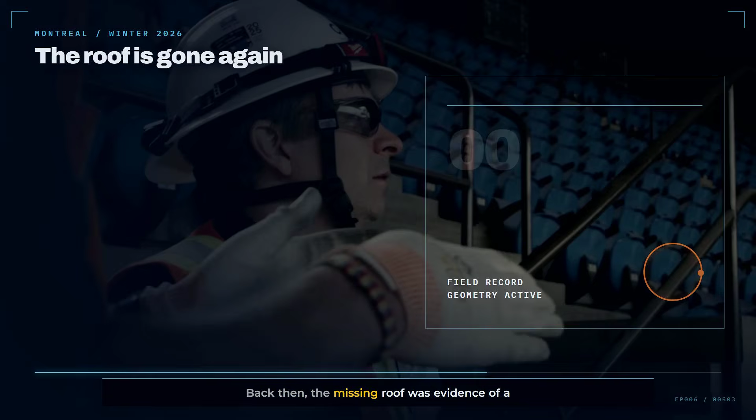In the winter of 2026, Montreal's Olympic Stadium looked strangely familiar. The white roof was gone. The center of the building was open to the sky. Around the opening stood the same concrete ribs that television cameras had shown 50 years earlier, when athletes entered this stadium for the 1976 Olympics. Back then, the missing roof was evidence of a deadline the builders had not met. This time, crews had removed it on purpose.

They took down 42,019 square meters of fabric. They dismantled 1,332 tons of steel and pulled out more than 22 kilometers of cable. Beneath the field, workers poured over 1,700 cubic meters of concrete just to protect the floor from the machines that would work above it. Quebec has committed 870 million Canadian dollars to put a roof back.

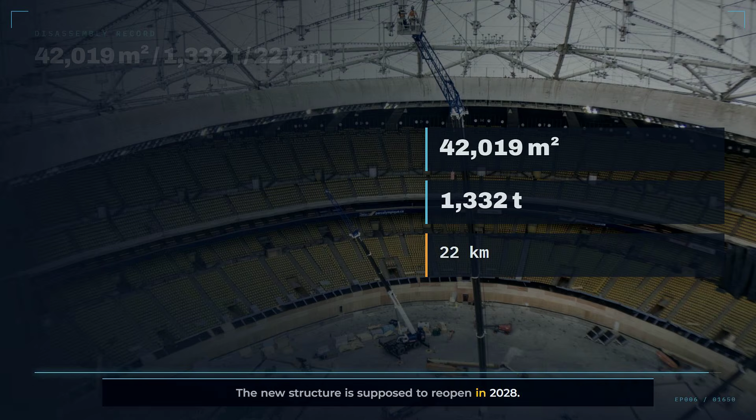Not the roof the architect promised, not the roof that finally arrived 11 years after the Olympics, not the roof that replaced that one and split open during preparations for an auto show. This will be a third answer to the same problem. The new structure is supposed to reopen in 2028. It will be rigid and permanent. Crews will assemble it near ground level, lift it more than 60 meters, and connect it to a stadium whose load path was designed around a very different idea.

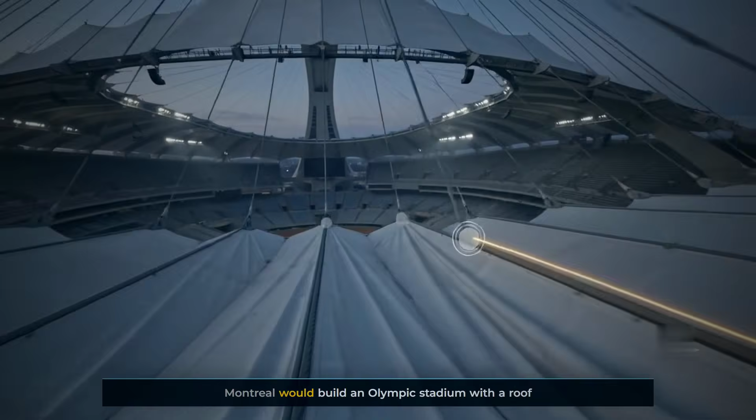That idea was simple enough to describe. Montreal would build an Olympic stadium with a roof that could disappear. It was much harder to make real. For half a century, the roof has controlled what this building can do, when it can open, and how much public money must follow it. The stadium has hosted baseball, football, soccer, concerts, trade shows, and more than 66 million visits. It is not an abandoned ruin, but it is a building whose most famous moving part never became dependable.

To understand why Quebec is spending almost another $1 billion, we have to begin before the first concrete rib rose from the ground. We have to begin with a mayor who believed deadlines could be commanded, an architect who designed buildings like sculptures, and a roof that depended on a tower which did not yet exist.

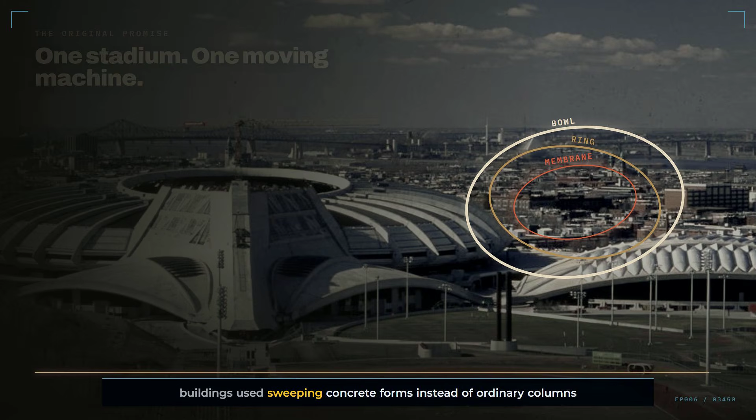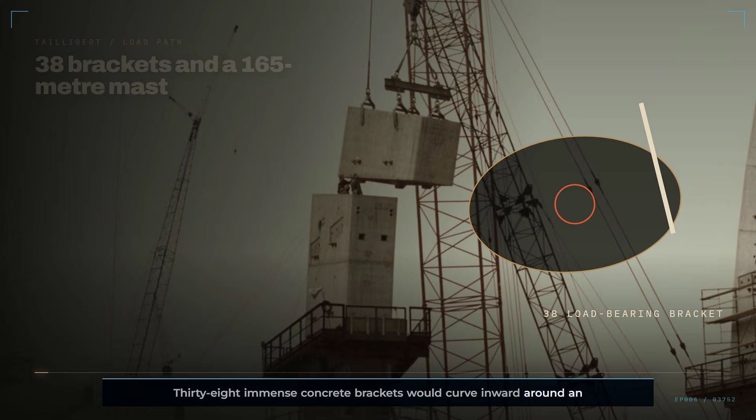Jean Drapeau wanted the 1976 Olympics to announce Montreal as a modern world city. He chose the French architect Roger Taillibert, whose sports buildings used sweeping concrete forms instead of ordinary columns and boxes. Taillibert did not draw a conventional stadium with a lid placed on top. He drew one system. 38 immense concrete brackets would curve inward around an elliptical bowl. They would support the fixed edge of the roof and the upper structure of the stadium.

Beside them, a mast would lean over the site at 45 degrees. At its full height, the tower would rise 165 meters. The central roof would hang from that mast. Taillibert's scheme treated the open center as a suspended membrane. Steel cables would descend from the tower, pick up the fabric at 26 suspension points, and pull it into shape. Edge cables would tie the membrane back to the concrete ring. Winches inside the system would raise and lower the fabric.

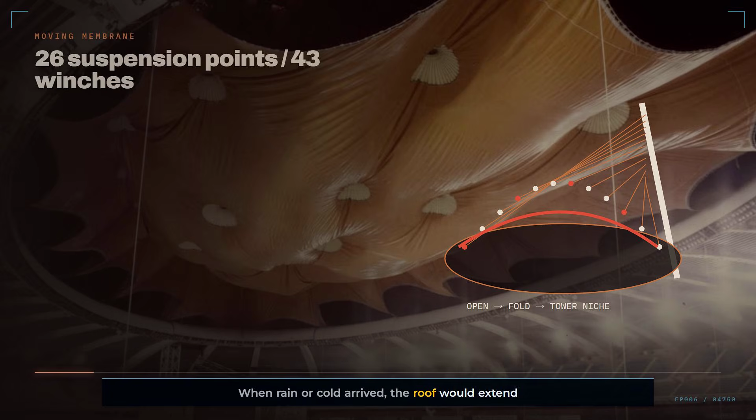When the weather was good, the membrane would fold and retreat into the tower. Spectators would see daylight. When rain or cold arrived, the roof would extend across an opening roughly 200 meters long and 140 meters wide. It was not a dome, it was closer to a tension saddle held in the air by a giant leaning crane.

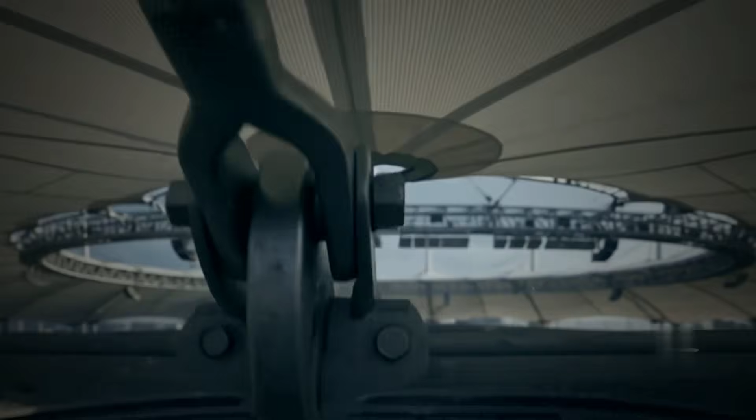That distinction matters. A rigid dome carries compression through solid members. A membrane carries load through tension. Its shape is part of its strength. Pull it evenly and it becomes stable. Let wind, snow, temperature, or one cable change the forces unevenly, and the shape responds everywhere.

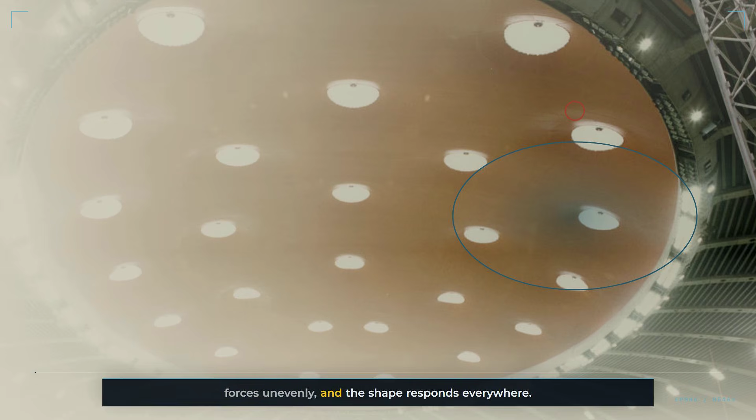The roof was also eccentric. Its tower stood on one side rather than directly above the center. The cable lengths and angles were different. A gust did not arrive as a neat, symmetrical laboratory load. Montreal's snow did not settle according to a drawing. None of that made the concept impossible. Cable roofs and fabric structures can cover enormous spaces with very little material.

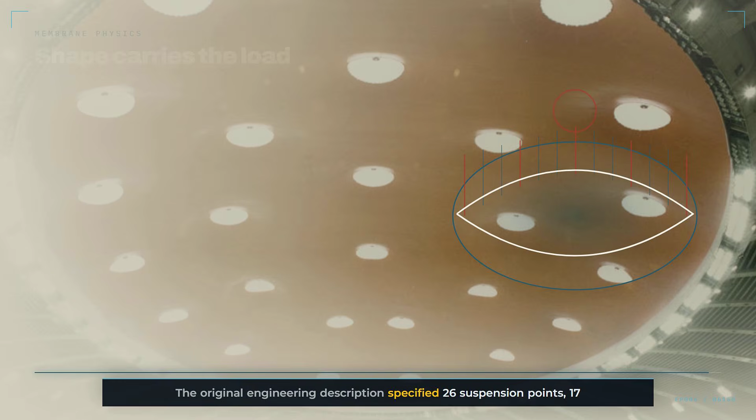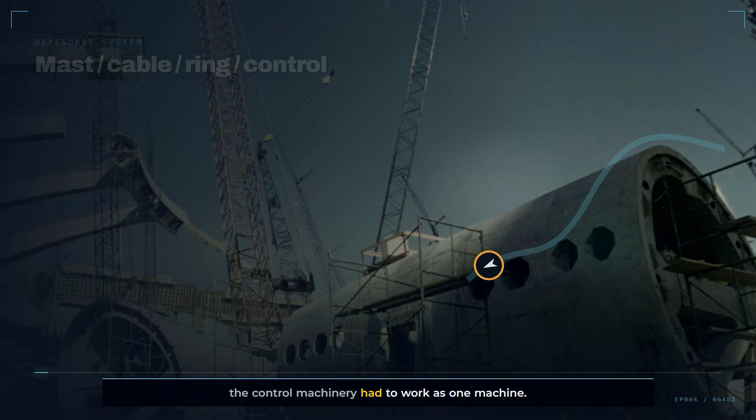The original engineering description specified 26 suspension points, 17 edge cables, 43 winches, and a nominal opening time of 30 minutes. But the roof, the mast, the concrete ring, and the control machinery had to work as one machine. Montreal started building before that machine was fully resolved. Excavation began in April 1973. The Olympic opening ceremony was a little more than 3 years away.

The stadium was made from thousands of precast and pre-stressed concrete pieces. A factory called Schokbeton was created to mold them. Each bracket arrived as a sequence of heavy segments that had to fit the geometry of the bowl and carry forces back into the foundations.

This was slow, exact work inside a political countdown. Construction disputes, labor stoppages, design changes, and rising costs consumed the schedule. By 1975, the province created the Régie des Installations Olympiques and took control of completing the facilities from the city. The date could not move, the design could. The builders concentrated on the parts required to hold the games.

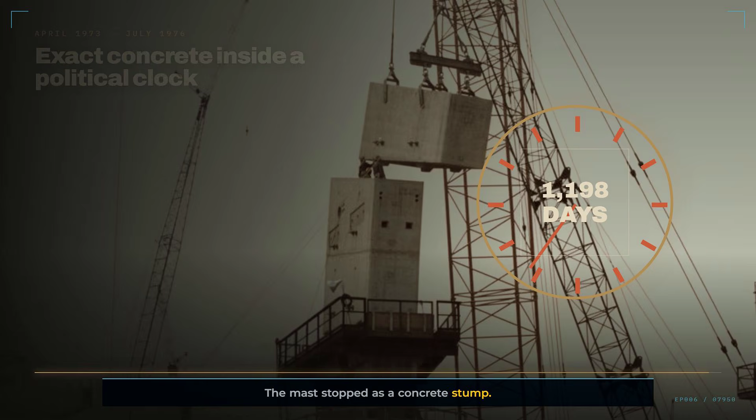They completed enough of the stadium bowl, seating, field, and fixed perimeter cover to receive the public. The mast stopped as a concrete stump. The moving roof remained a future component. On July 17, 1976, 12,000 athletes and officials entered before more than 76,000 spectators. Television carried the ceremony around the world.

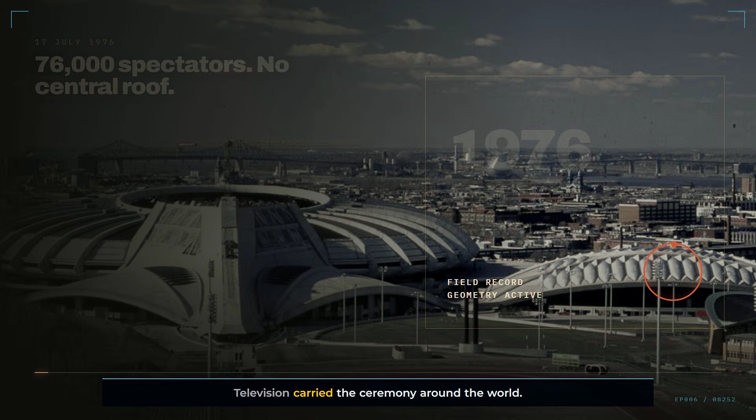Above them was an opening. The games could proceed because it did not rain during the opening ceremony. The unfinished tower sat outside the broadcast frame whenever the right camera angle could avoid it. The stadium fulfilled its immediate purpose, but the architecture shown in the model was still incomplete. The cost was no longer incomplete.

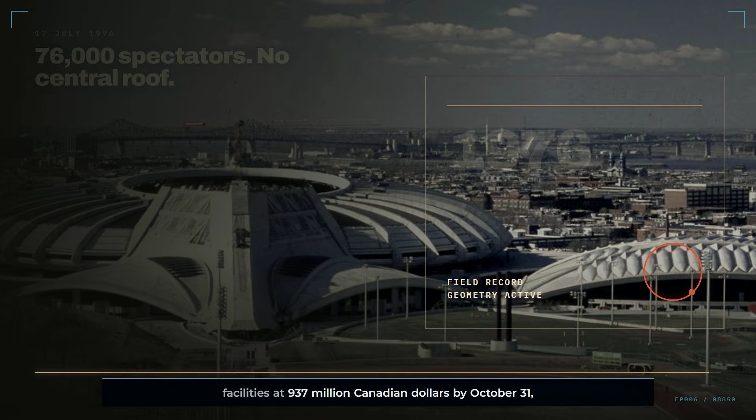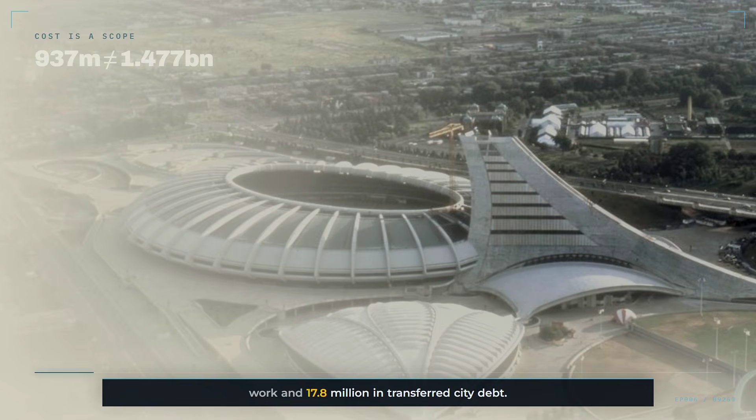Olympic Park's own history places the cost of the facilities at 937 million Canadian dollars by October 31st, 1976. Contemporary accounting cited 922 million for the installations at that point, followed by 537 million in post-games completion work and 17.8 million in transferred city debt. That produces a construction and completion scope of about $1.477 billion.

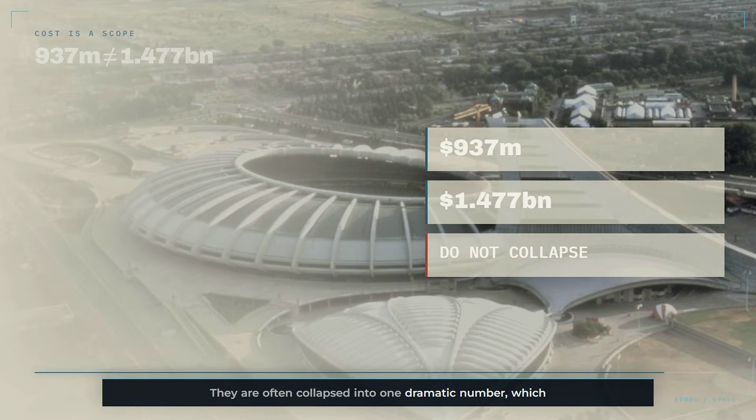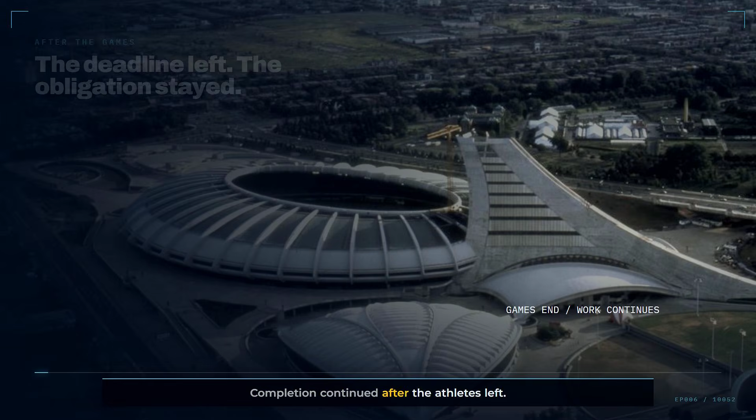Those figures do not contradict each other, they measure different dates and different baskets of cost. They are often collapsed into one dramatic number, which makes the story easier to repeat and harder to understand. The same problem appears whenever somebody says what the Olympics cost. The Games had an operating budget. The city and province built facilities. Borrowing added interest. Completion continued after the athletes left. Dedicated taxes and other financing paid the debt over decades.

The stadium became the most visible part of all of it, even when a number covered more than the stadium alone. Montreal still needed the building after 1976. The Expos needed a baseball home. Large exhibitions needed floor space. The city had a concrete bowl designed around a missing mast and roof. Leaving it unfinished would not make the obligation disappear. It would turn the original promise into a permanent hole, so the work continued.

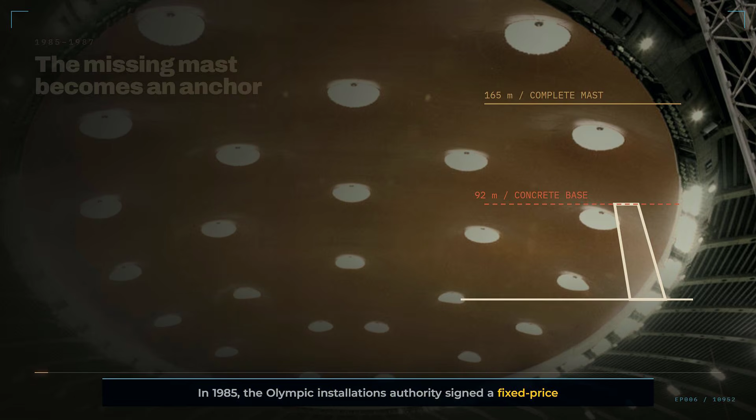In 1985, the Olympic Installations Authority signed a fixed-price contract worth $117.7 million to complete the tower, mast, and roof complex. Workers extended the tower from its 92-meter concrete base with a changing steel structure that reached the final height. The inclined tower became the tallest structure of its kind. It also became the anchor for the roof's cable system.

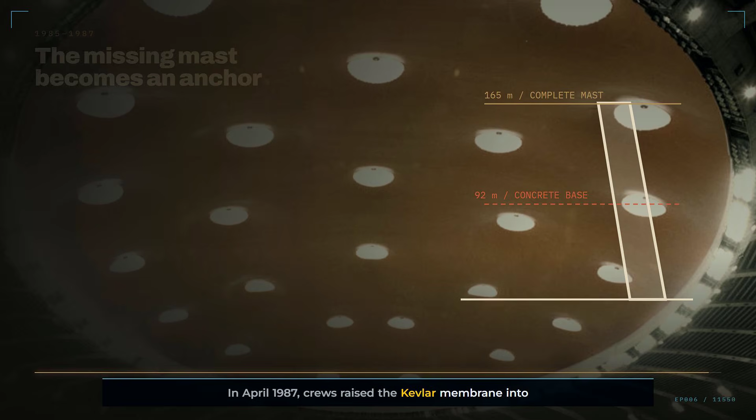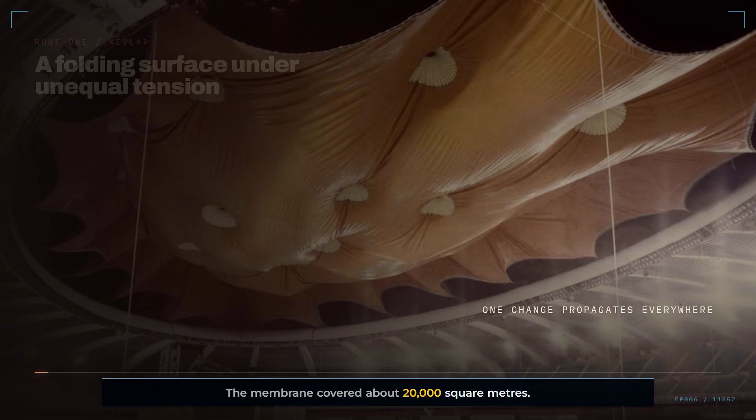In April 1987, crews raised the Kevlar membrane into place. The Expos played their first game beneath it days later. 11 years after the Olympics, the stadium finally matched the basic silhouette in Taillibert's model. The membrane covered about 20,000 square meters. 26 cables from the mast carried its internal suspension points. 17 edge cables tied it to the perimeter. 43 winches controlled the system.

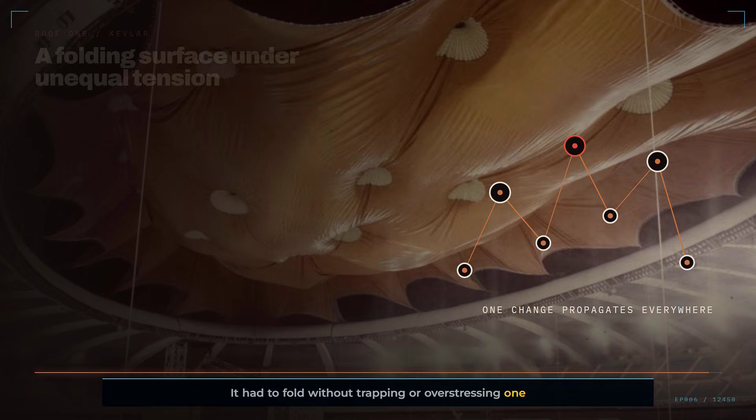An inner winter membrane could be installed below it to reduce heat loss and condensation. When the roof opened, machinery drew the fabric upward toward a storage space in the tower. It had to fold without trapping or overstressing one area. When it closed, the winches had to return the suspension points to the correct geometry and tension.

The first serious warning arrived a little more than a year after installation. In August 1988, a storm with winds around 80 km per hour tore the membrane in two places. One tear was about 40 meters long. Another was about 5. The following month, a 4-meter tear occurred while the roof was being moved. The Olympic Park history attributes that event to human error.

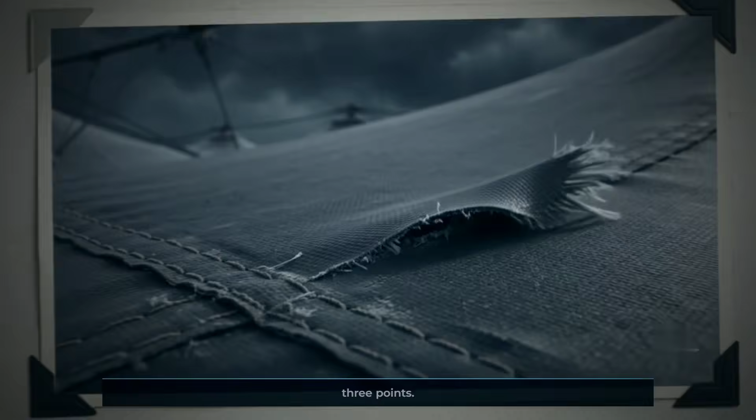In April 1991, strong winds tore the membrane at 3 points. In June, another rupture ran roughly 120 meters. These were not cosmetic pinholes. A tension membrane works because load can travel through an intact surface and cable network. A tear changes that path. The load concentrates at the edge of the damage.

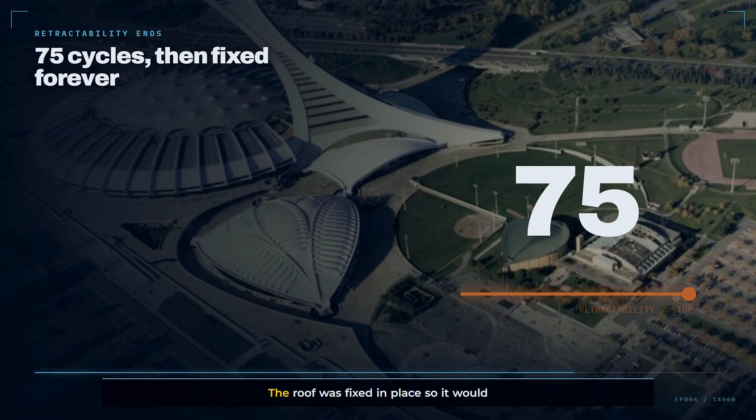Wind can enter the opening, lift the fabric, and drive the rupture farther. Repairing the material did not remove the conditions that made movement risky. In January 1993, the operators abandoned retractability. The roof was fixed in place so it would no longer tear during opening and closing.

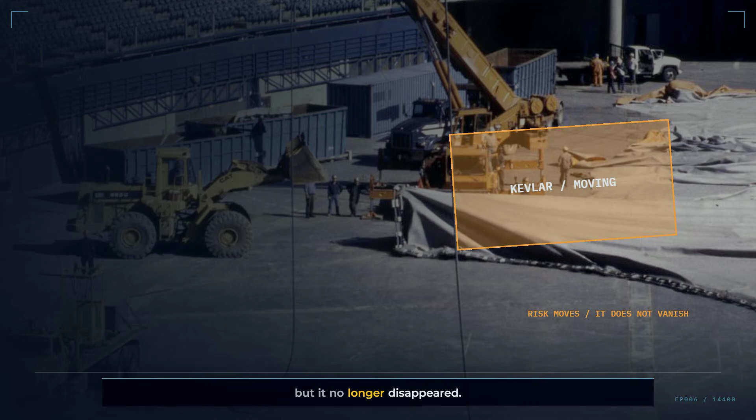The machine built to make the stadium special had completed only 75 folding cycles. For the next several years, Montreal had a roof, but it no longer disappeared. The tower still held the cables. The membrane still carried weather. The stadium had paid the complexity cost of a retractable system and lost the retractable result.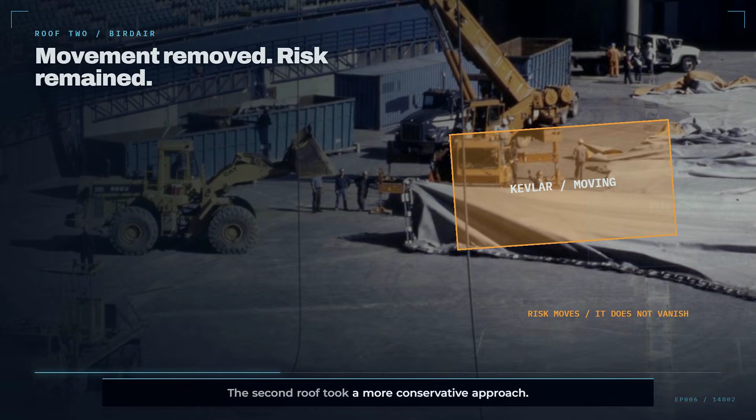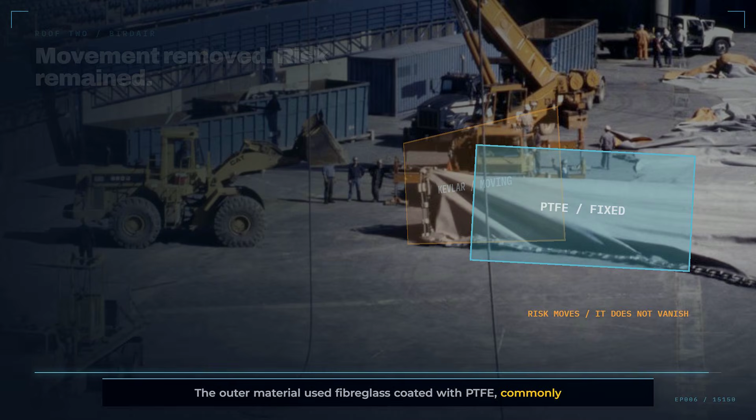By 1996, the authority was seeking a replacement. The second roof took a more conservative approach. It would not move. Birdair supplied a fixed membrane divided into 63 panels and supported on a steel cable grid. The outer material used fiberglass coated with PTFE, commonly called Teflon. This kind of architectural fabric is light, durable, and capable of spanning large openings.

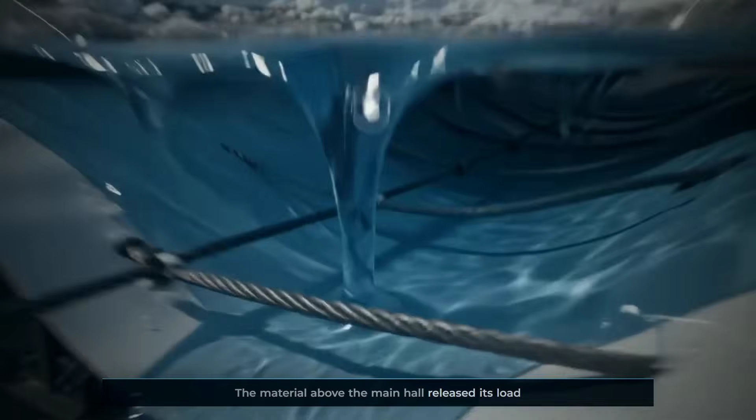The old Kevlar roof came down in May 1998. The new system closed the stadium later that year. Then winter found the load path. On January 18, 1999, a snowstorm was followed by rain. Snow, ice, and water accumulated on the roof. One panel tore. The material above the main hall released its load into the building while crews were preparing the Montreal Auto Show. The show was cancelled.

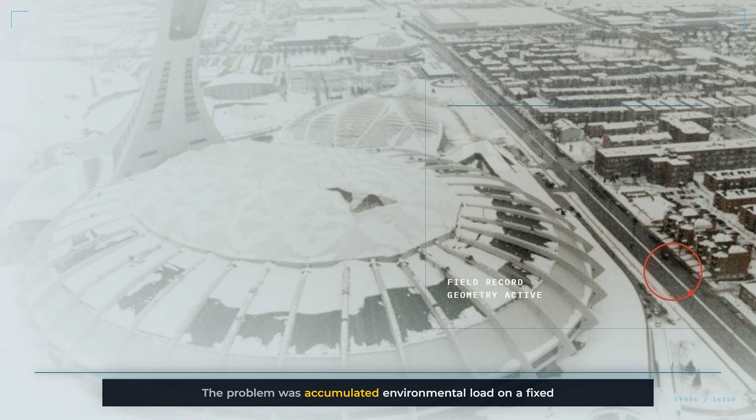The second roof had failed within months, but not in the same way as the first. There was no folding cycle to blame. The problem was accumulated environmental load on a fixed fabric surface. Montreal receives roughly 2 meters of snow in an average year. Snow does not remain a light, uniform blanket. Wind piles it into drifts.

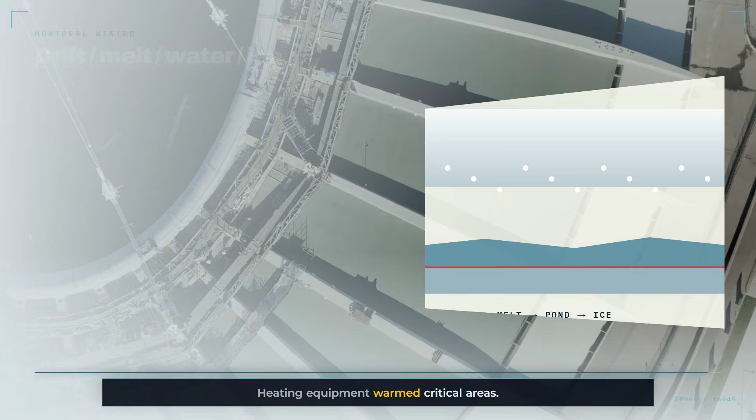Heat from inside can melt the underside. Water moves toward low points. A cold layer can trap that water or turn it back into ice. Rain adds mass quickly. The roof therefore became an actively managed winter system. Operators watched weather forecasts and measured cable loads. Heating equipment warmed critical areas. Almost 8 kilometers of radiant cable ran through valleys in the roof to help melt snow and ice.

Crews used protocols for clearing accumulation and limiting access beneath the membrane. These measures kept the stadium operating, but they changed the meaning of fixed. The roof did not move by design, yet the building still needed people, sensors, heat, inspections, and weather restrictions to keep the surface within safe limits.

Small tears accumulated. The Olympic Park's 2023 to 2024 annual report says the summer 2023 inspection found more than 19,500 tears. That figure does not mean 19,500 open holes large enough to see from the field. Many were small defects and repairs in a fabric system approaching the end of its useful life. But each inspection added evidence that the membrane was not a permanent answer.

Winter events became difficult to schedule. Organizers could not treat the stadium like an ordinary enclosed arena. A major booking involves trucks, crews, tickets, insurance, and dates that cannot simply slide because snow enters the forecast. The roof was still covering the field. It was no longer giving the building certainty.

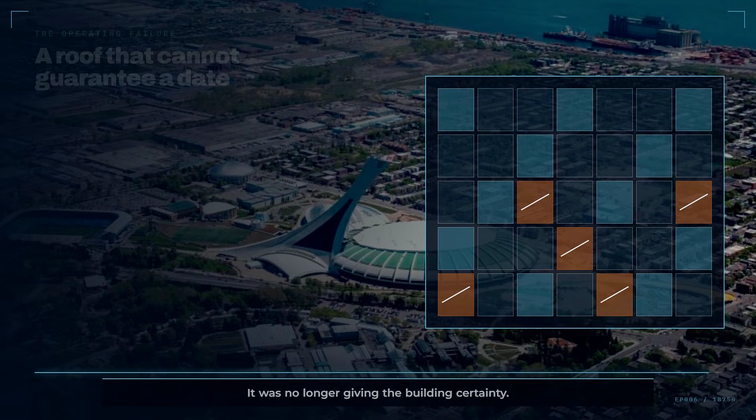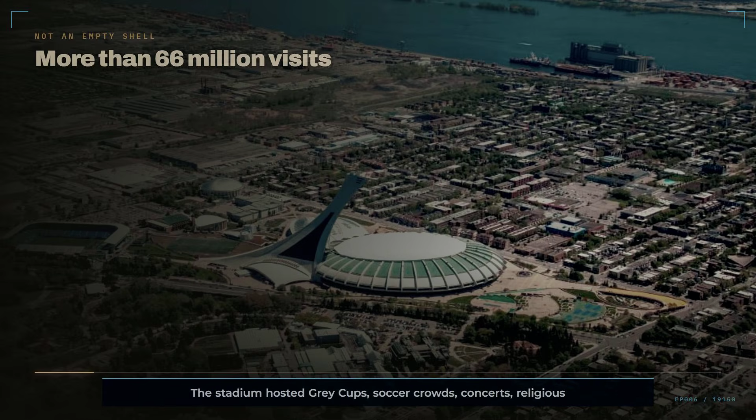It is tempting to stop here and call Olympic Stadium a white elephant. That description is too easy. The Expos played there from 1977 until the team left Montreal after the 2004 season. The stadium hosted Grey Cups, soccer crowds, concerts, religious gatherings, trade shows, and the 2015 CONCACAF Champions League final. The Olympic Park says more than 66 million people have attended events in the building.

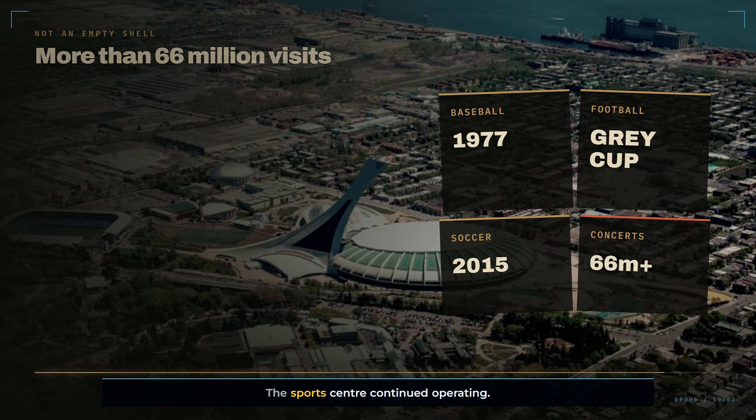The wider site also changed. The old velodrome became the Biodome. The tower gained an observatory and offices. The sports center continued operating. The metro already served the complex. Montreal did not spend decades maintaining a completely empty shell. The harder question is whether the building's use justified the continuing constraints and public cost.

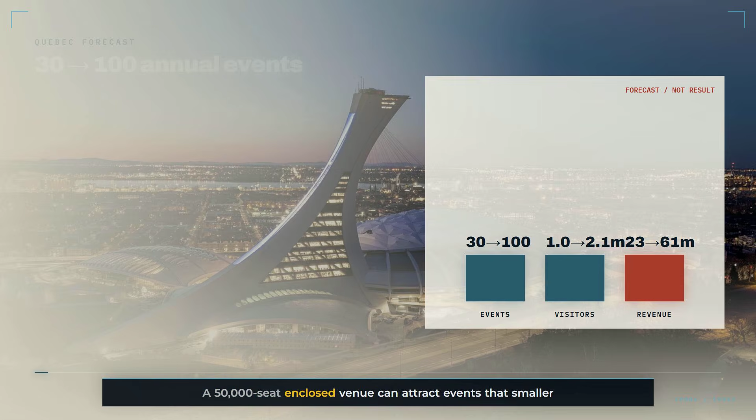A 50,000-seat enclosed venue can attract events that smaller arenas cannot hold. It can also sit empty for long periods because very few events need that capacity. A roof problem makes that booking gap worse. Promoters need confidence years ahead. Weather restrictions turn a large venue into a seasonal gamble.

That is the case Quebec now makes for reconstruction. The government says a dependable roof could increase the annual number of events from about 30 to 100. It forecasts paying visitors rising from 1 million to 2.1 million, gross revenue rising from $23 million to $61 million, and more than $20 million a year in provincial tax receipts.

Those are forecasts, not results. They assume the stadium can win events, fill dates, and operate without another roof cycle consuming the gains. They also describe the whole Olympic Park business plan, not a check produced by the roof alone.

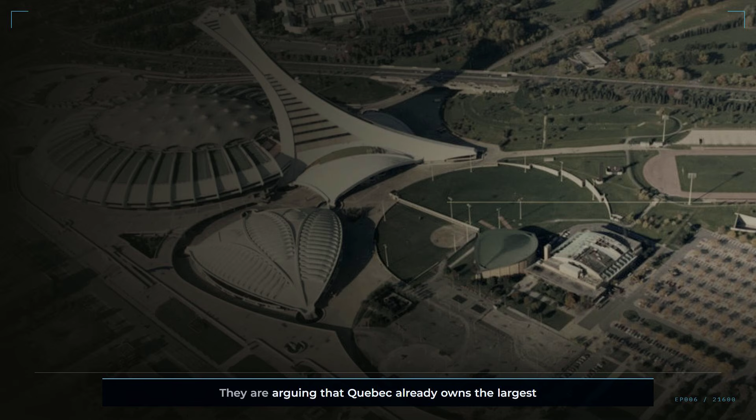Still, there is a real economic difference between a building that organizers trust and one they cannot book in winter. The stadium's defenders are not arguing only from nostalgia. They are arguing that Quebec already owns the largest venue, the metro connection, the concrete structure, and the surrounding institutions. A functioning roof might unlock an asset that is expensive to replace.

Its critics look at the same history and see sunk cost logic. Every previous round was presented as the work that would finally make the stadium whole. To decide between those views, the roof cannot be separated from the way the building was paid for. Montreal's Olympic debt lasted 30 years.

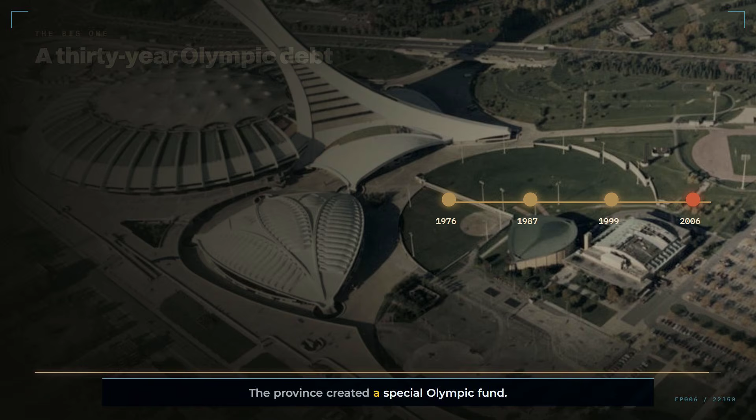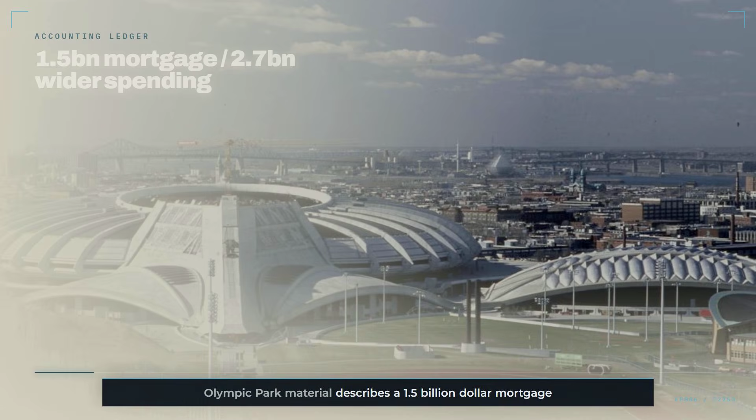The province created a special Olympic fund. Tobacco taxes became one of the revenue streams used to repay the facilities. Financing costs continued long after construction crews left. The final mortgage payment was made on November 14, 2006. Olympic Park material describes a $1.5 billion mortgage on the facilities. A 2026 Bank of Canada museum account places total spending connected to the games and debt repayment at $2.7 billion by the time the debt was cleared.

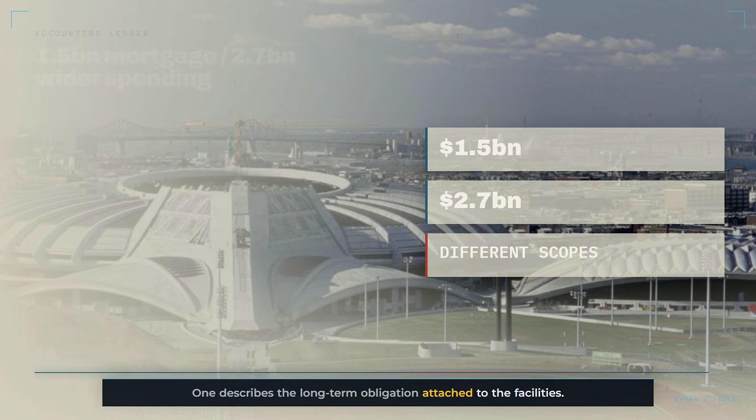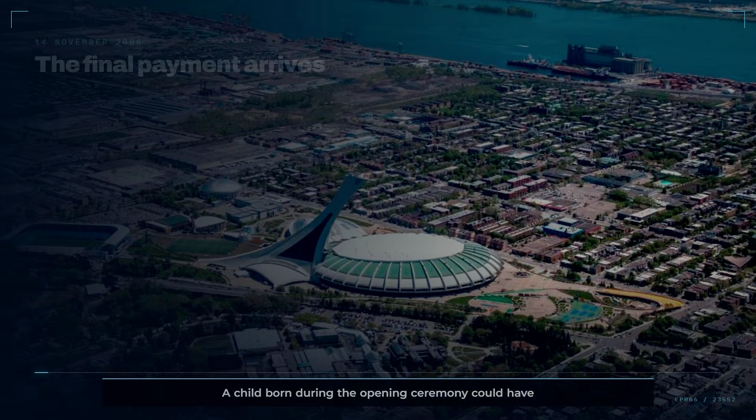Again, those numbers answer different questions. One describes the long-term obligation attached to the facilities. Another includes the wider spending and financing history. Neither should be presented as the price of one roof, but the dates matter. A child born during the opening ceremony could have turned 30 before the final payment. By then, the first roof had been abandoned, the second had already torn, and the Expos had left for Washington.

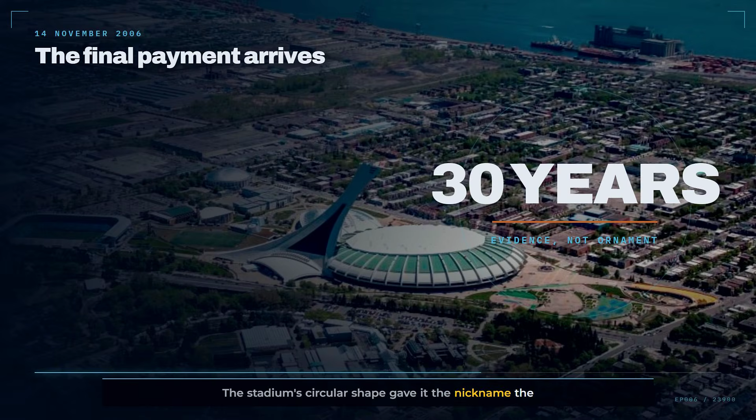The debt became part of Montreal's Olympic identity. The stadium's circular shape gave it the nickname the Big O. The bill supplied the second name, the Big Owe. That joke survives because it compresses complicated accounting into one image. It also hides the decisions that came after 1976. The province did not spend $870 million in 2024 because the original builders left an unpaid invoice. It made a new choice about an old asset.

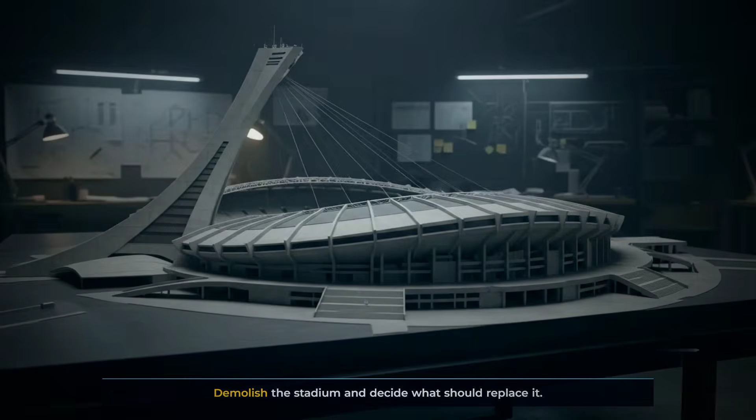That choice had three broad options: keep repairing the existing membrane until operation became impossible, demolish the stadium and decide what should replace it, or remove the roof and technical ring, preserve the concrete bowl and mast, and build a fixed structural system intended to last. Quebec chose the third. The public justification included an estimate that demolition would cost about $2 billion.

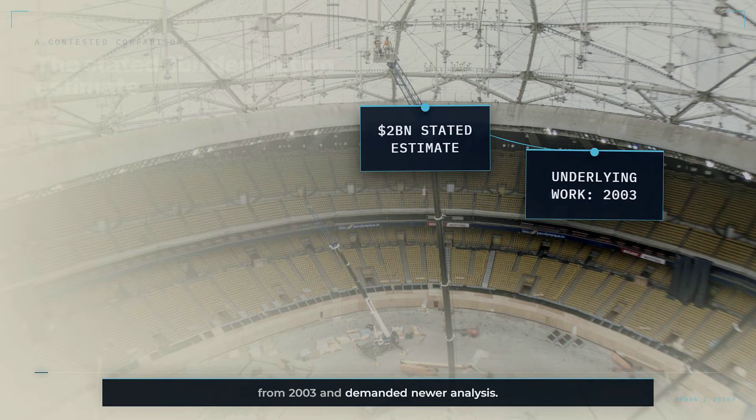During legislative questioning, the tourism minister acknowledged discussion around the age of the underlying work. Opposition members said the figure relied on a study from 2003 and demanded newer analysis. They also sought publication of the studies behind the government's economic return claims. The demolition figure should therefore be treated as the government's stated estimate, not an uncontested current bid.

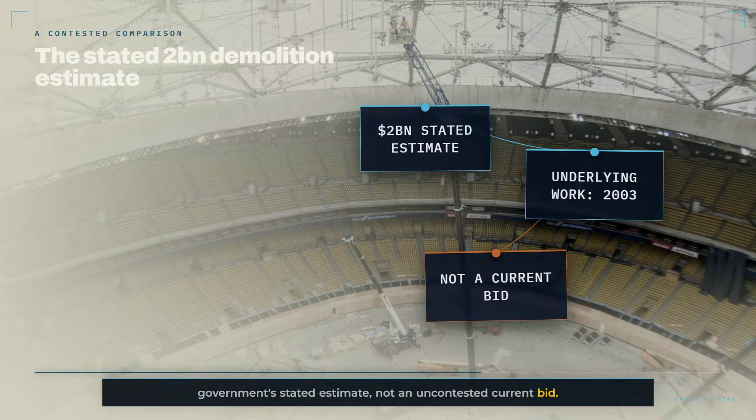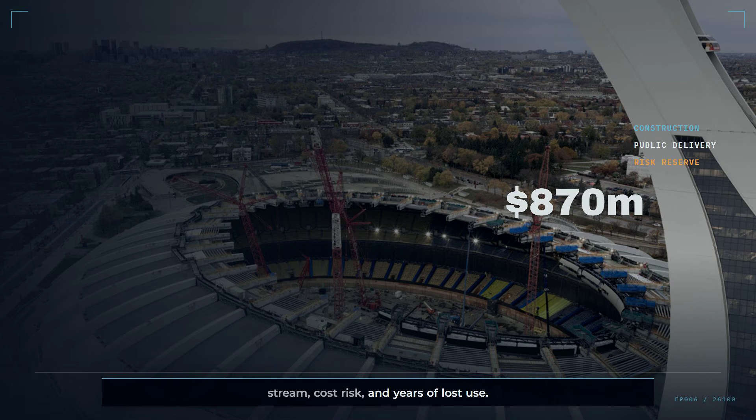Demolition would be unusually difficult. Pre-stressed concrete does not come apart like stacked blocks. The mast leans over the site. The stadium connects to other occupied facilities. Removing it would create its own engineering project, waste stream, cost risk, and years of lost use. But difficulty does not automatically prove that reconstruction is the better investment. That proof now depends on Roof 3.

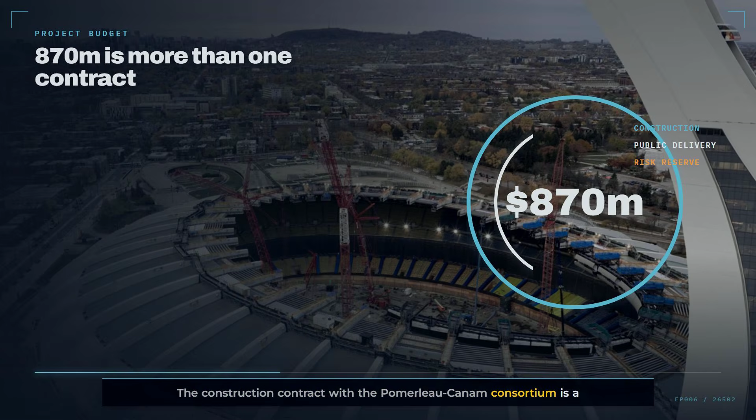The headline number is 870 million Canadian dollars. The construction contract with the Pomerleau-Canam Consortium is a large part of it, but the two numbers are not identical. Olympic Park explains that the total also includes public planning, development of the technical solution, support from Quebec's infrastructure agency and professional firms, contingencies, risk reserves, and internal project costs.

This matters because a contract price and a project budget protect against different things. The contractor can accept a lump sum obligation for defined work. The public owner still carries planning costs, oversight, changes outside that scope, and risks allocated to the owner. A project can stay within its construction contract and still require money elsewhere.

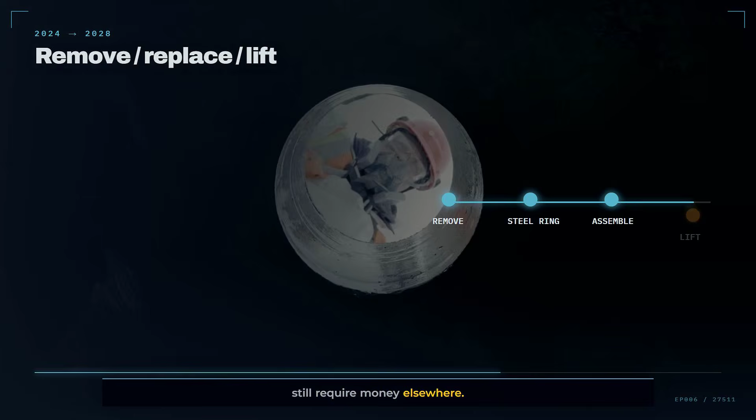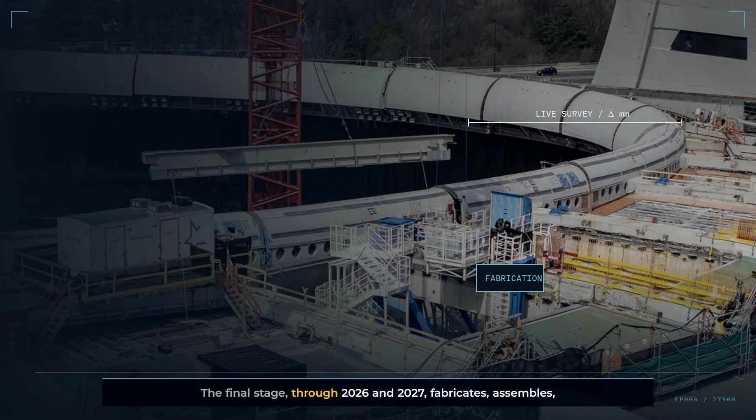The current schedule divides the work into three major stages. First came removal of the Birdair membrane and winterization of the open building. Then crews began dismantling the old concrete technical ring and replacing it with steel. The final stage, through 2026 and 2027, fabricates, assembles, lifts, and installs the new roof. Reopening is scheduled for 2028.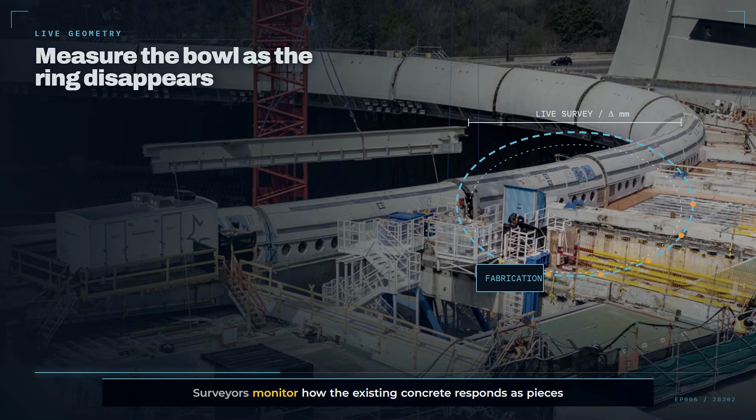The stadium must survive the replacement. Removing the old ring changes weight and stiffness around the top of the bowl. Surveyors monitor how the existing concrete responds as pieces disappear. Designers feed those measurements back into fabrication information for the new steel structure. Below, construction activity is stacked over spaces and systems that cannot simply be treated as an empty field. Crews poured the protective slab and modified mechanical and electrical systems.

With the stadium exposed to Montreal winter, temporary barriers and heat must maintain minimum conditions in the occupied interior areas. The old roof was light but maintenance heavy. The new roof is rigid and transfers load differently. Its central section combines metal framing and membrane elements. Around the perimeter, translucent glass is intended to bring daylight into a building long criticized for feeling sealed from the city. A new steel technical ring replaces the heavy concrete ring.

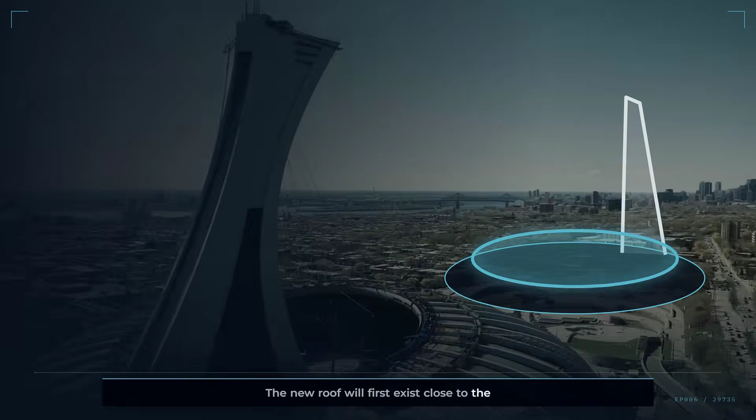Most important, it does not retract. The moving promise has been removed from the requirements. The new roof will first exist close to the ground. Building it low gives crews access without turning every connection into high-altitude work. It allows sections to be assembled, surveyed, and checked inside the stadium bowl. When the structure is ready, the project will raise it more than 60 meters to meet the mast and perimeter. That lift will be one of the most consequential movements the roof ever makes. Afterward, the structure is meant to stay there.

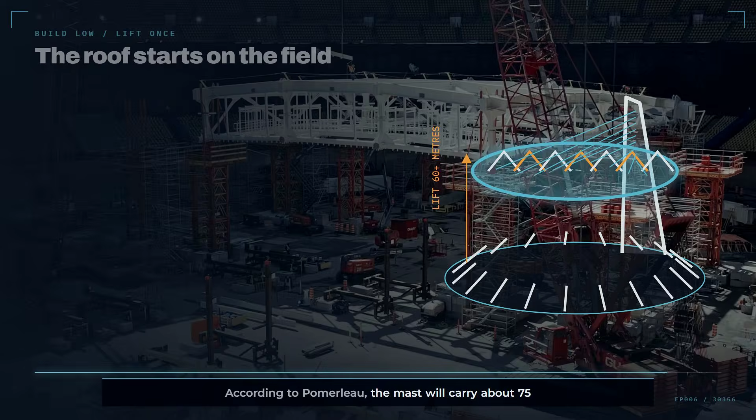According to Pomerleau, the mast will carry about 75% of the roof load. The 38 existing concrete brackets will carry the remaining 25%. The new steel ring distributes forces between them. That arrangement keeps Taillibert's mast structurally relevant without asking it to operate a folding membrane. The tower remains part of the silhouette and part of the load path. The roof gains rigid members that can control geometry under snow and wind.

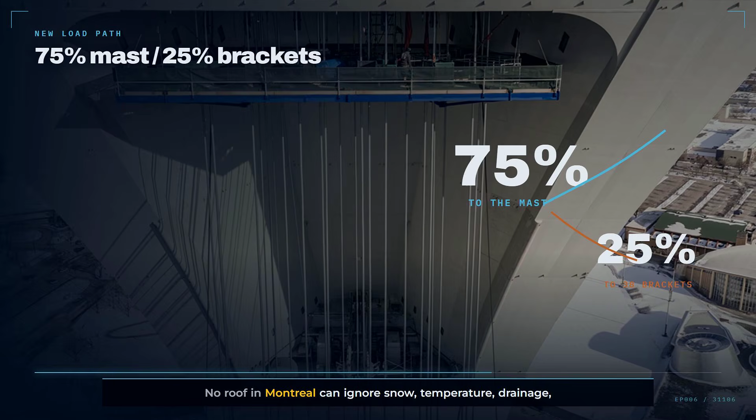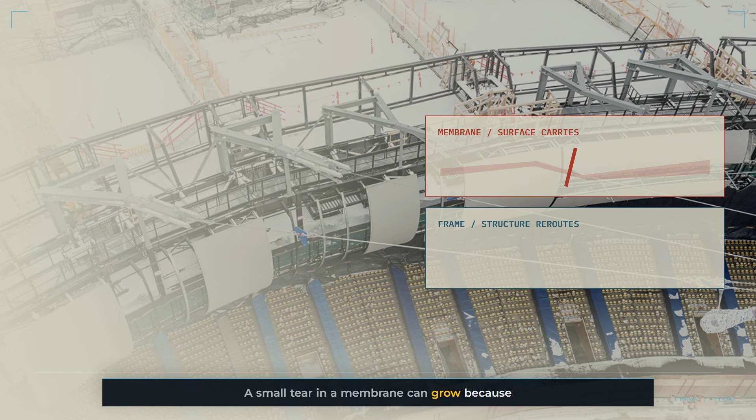The design does not eliminate maintenance. No roof in Montreal can ignore snow, temperature, drainage, seals, glass, or corrosion. Rigid structures also move under load. Connections fatigue. Water finds details the rendering did not show. What changes is the failure mode. A small tear in a membrane can grow because the surface itself carries tension. A rigid framed roof can route force around local cladding damage, provided the structure and connections have been designed for it. Inspectors can separate the weather skin from the primary load-bearing frame.

The new ring also replaces aging concrete at the most complicated interface in the building. Steel lowers weight and can be fabricated to measured geometry. Curved aluminum cladding will echo the old form without pretending the old technical system remains. The translucent perimeter is more than decoration. It creates a visual break between the existing concrete bowl and the new central roof. From inside, daylight will reveal that the roof is a new intervention. That honesty may be its strongest design decision.

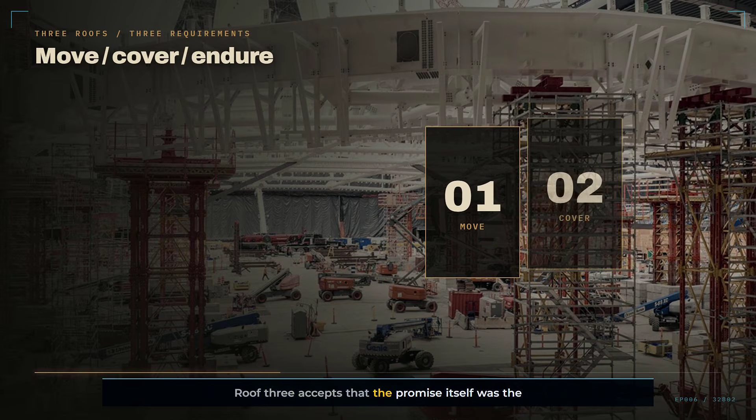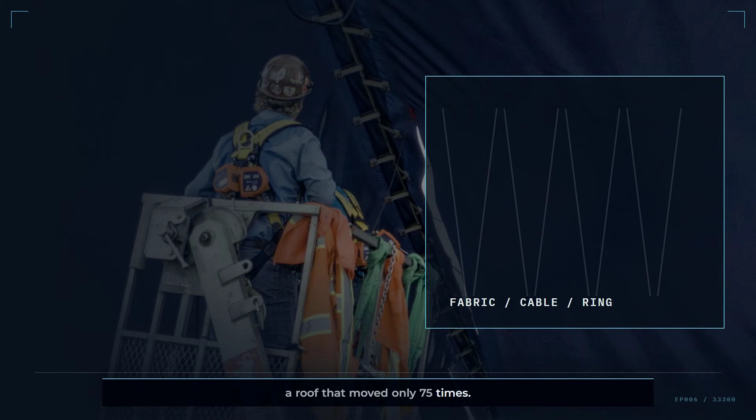Roof 1 tried to complete the 1972 promise. Roof 2 tried to keep the suspended fabric idea while removing movement. Roof 3 accepts that the promise itself was the wrong operating requirement. It preserves the stadium by changing what the stadium is allowed to be. In 1976, Montreal opened an unfinished stadium because the deadline mattered more than completion. In 1987, it completed the original silhouette and received a roof that moved only 75 times. In 1998, it replaced that roof with a fixed membrane that failed during its first winter and accumulated more than 19,500 recorded tears by 2023.

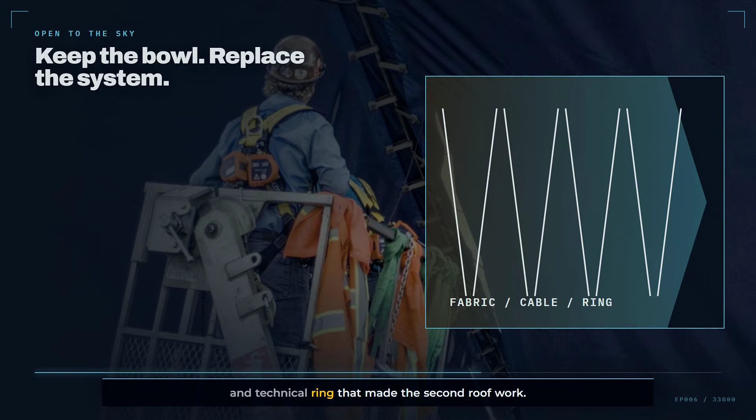Now the stadium is open to the sky again. The current project has stripped away the fabric, cables, and technical ring that made the second roof work. It is keeping the concrete bowl and the mast. It is also keeping the public argument that follows this building everywhere. Supporters see an irreplaceable venue with a metro station, a 50,000 seat capacity, and 50 years of cultural use. They see a roof that can restore 100 event days a year and turn an unreliable asset into a working one.

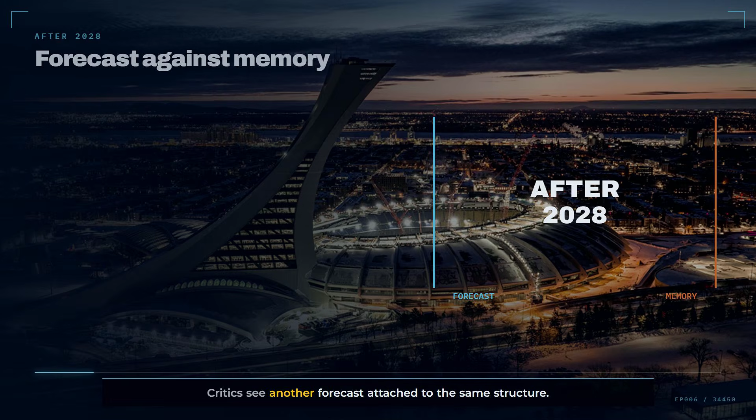Critics see another forecast attached to the same structure. They see an $870 million commitment supported by a demolition comparison whose underlying estimate is old. They remember that each roof arrived with confidence. Both sides are looking at real evidence. The answer will not come from the rendering. It will come after 2028, in winter when snow crosses the city and event organizers decide whether they trust the dates on their calendars.

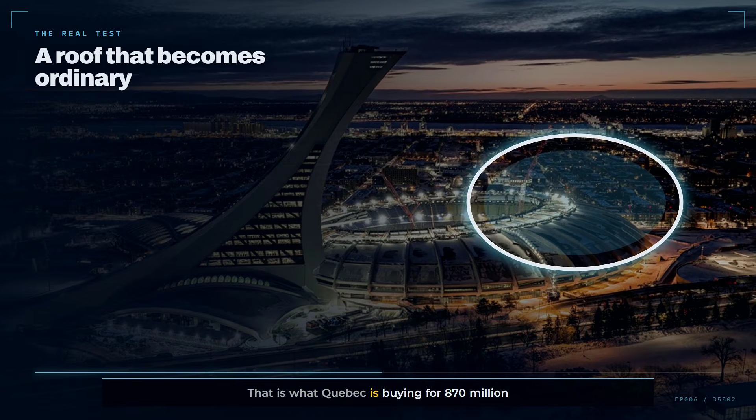The stadium does not need a roof that performs a trick. It needs one that becomes ordinary. No emergency closure, no weather clause that empties the schedule, no membrane that has to be watched as a single field of tension, no new repayment story that outlives the people who approved it. That is what Quebec is buying for $870 million. Not the missing piece of the 1976 model, but permission to stop chasing it. 50 years after the first opening ceremony, Montreal is trying to finish the stadium by abandoning the part that was never truly finished.